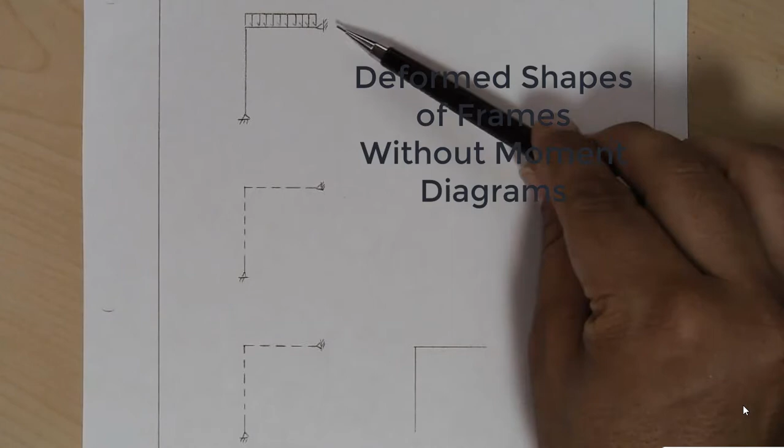In this example, we're going to draw the deformed shape of the frame shown, and we're going to do this without the benefit of having a moment diagram. What I'm showing here is the frame pinned at both ends, L-shaped frame, uniform load across the top beam. These are just two segments where I'm going to draw first a trial shape that we'll get wrong, and then the correct trial shape. Once I have that, I'm going to look over here and I'm going to sketch out the moment diagram that's implied by that trial shape.

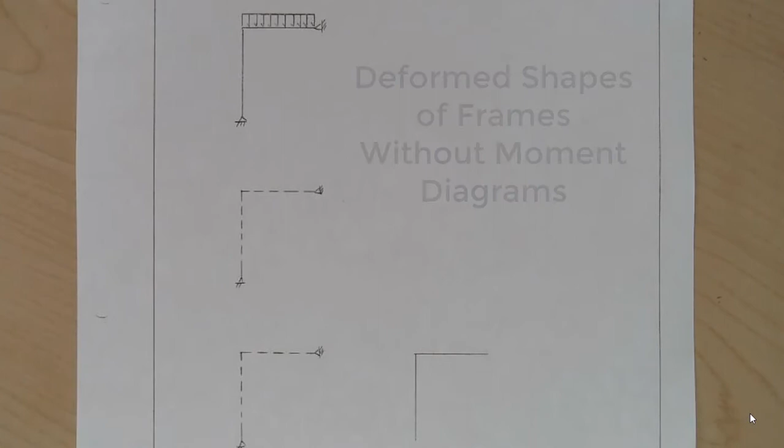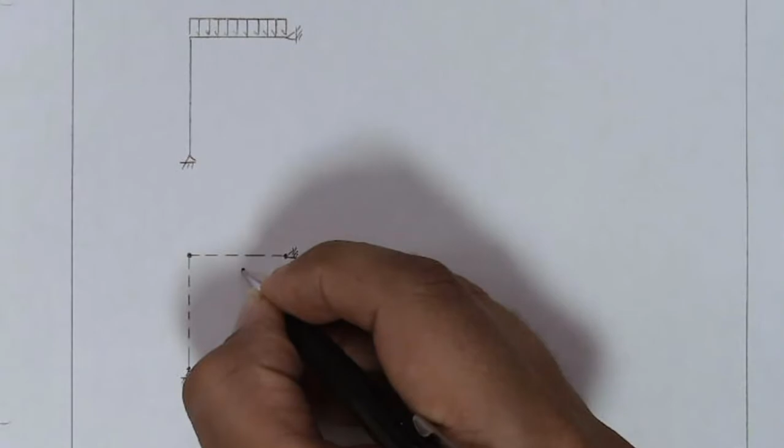Let's start. We have a couple pieces of information here. One is boundary conditions at each of the pins, and since we assume that frame members don't stretch, we also know that this point has to stay right there. I'm going to start by saying that, listen, here's a uniform load, it's pushing down, so somewhere here the middle of the beam needs to be pushed downward. So I'm going to sketch a little smooth shape through here.

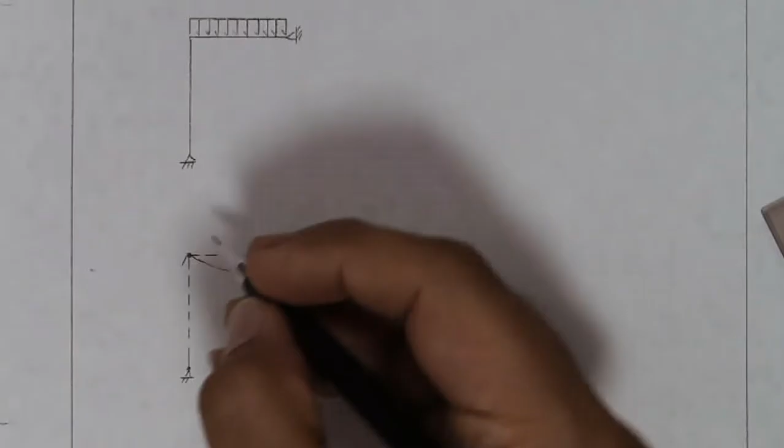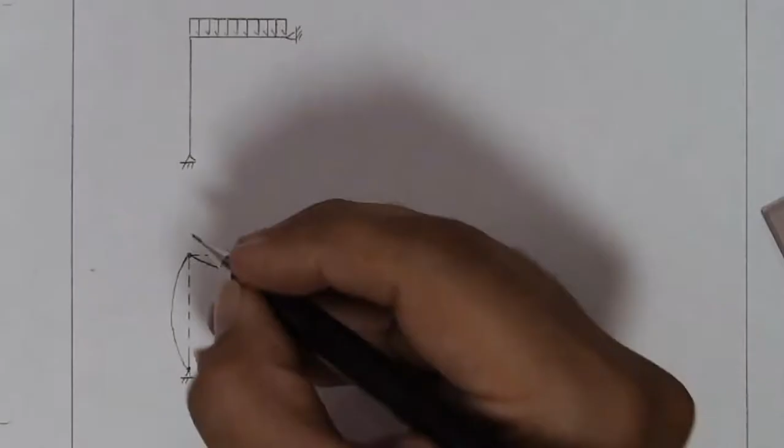This little point's distracting at this point. I'll erase it. I know that I need a right angle here, so I'll make sure that I respect a right angle at that joint, and I'll continue downward here. I'm gonna just darken this a little bit. So here's my first trial shape. And let's evaluate. I've accounted for the boundary conditions. I have accounted for the continuity of angle. I'm not allowing that angle to change. I don't really know if I've gotten my curvatures right. I have nothing else to reference it against.

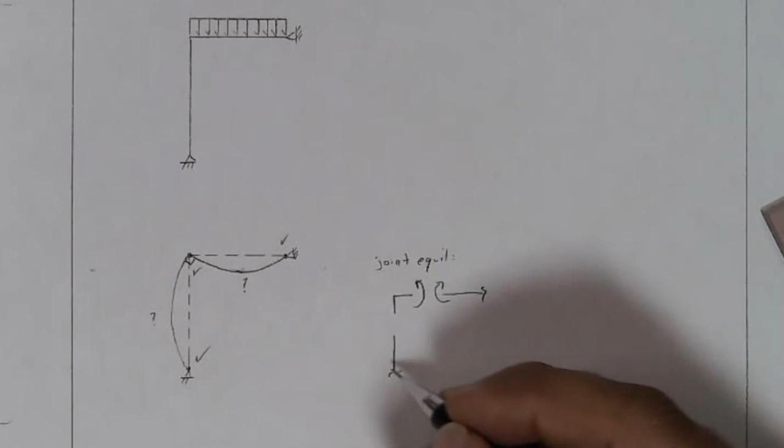But I do need to look at joint equilibrium. And if I look at joint equilibrium, and actually I'm going to look at the adjoining members here. The horizontal member on the right hand side has upward curvature, which requires a moment like that, equal and opposite onto the joint. Looks like that. This vertical member has rightward curvature that requires that moment. Equal and opposite onto the joint, I have that reaction.

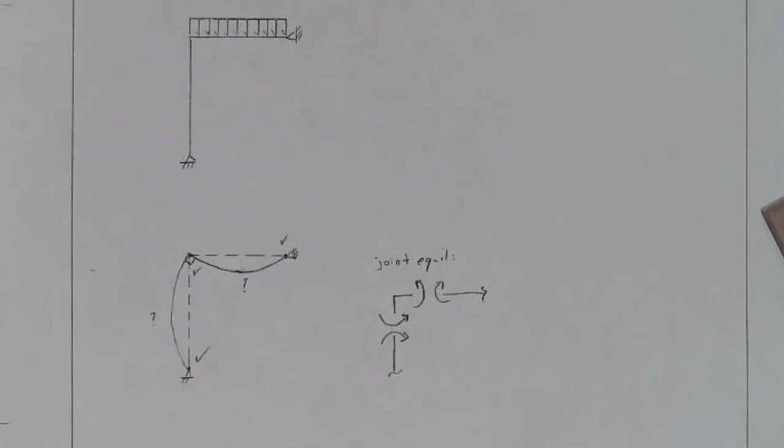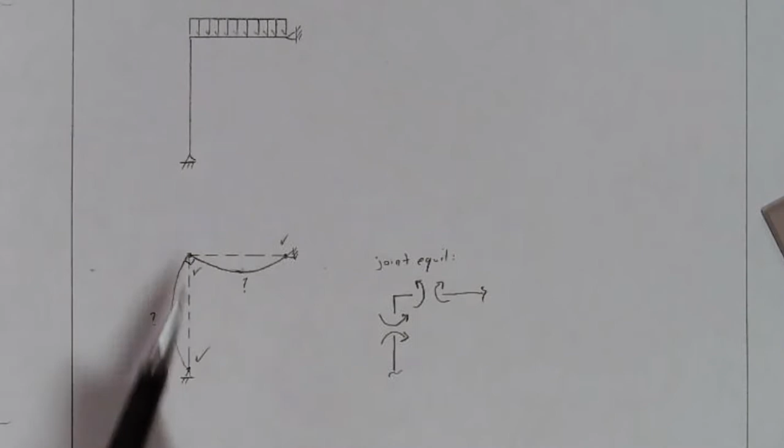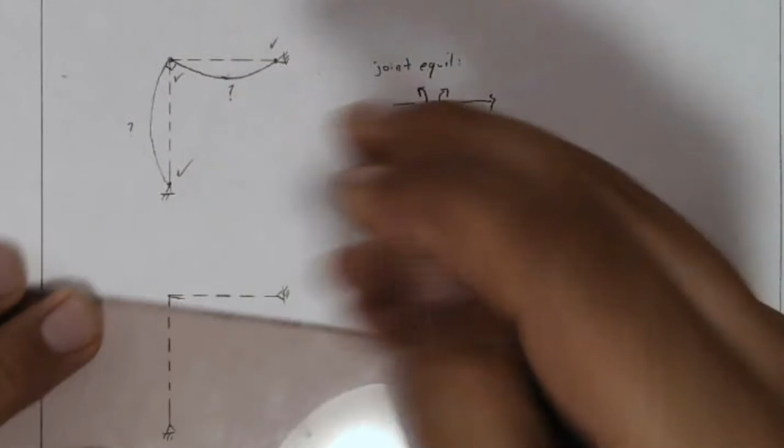And the problem that I've exposed here is that both of these moments are acting counterclockwise. So this joint, as I've drawn it in this shape, cannot be like that. That joint would not be in equilibrium, it would be spinning. So I have to fix something. And what I'm going to do is I'm going to allow this joint to relax a little bit. I'm going to make it so that it doesn't rotate quite so much. Now this is going to require some detail in the drawing. Certainly have to be careful with how I do this.

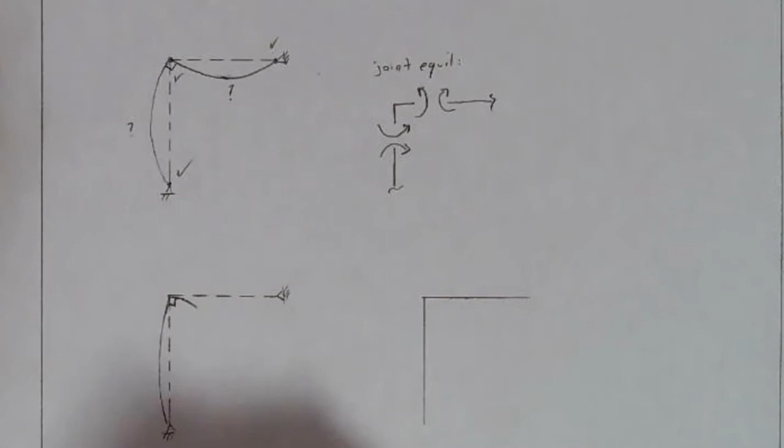So I'm still maintaining the right angle. I'm still showing a bit of a rotation. I'm still showing a bit of rightward curvature like that. But here I'm going to start by showing downward curvature, a point of inflection, and then upward curvature back in.

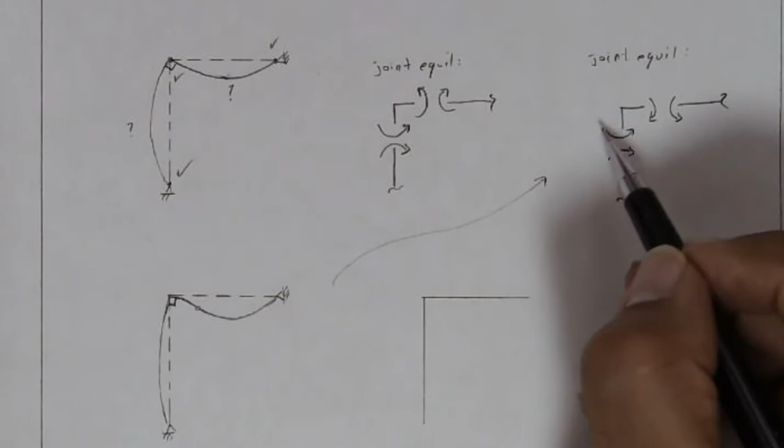So here, if I look at joint equilibrium in the other case, over here on the right hand side of that joint, I have downward curvature. Over here it's the same as before. What I notice in this sketch is that both of these moments point in opposite directions. That tells me that this joint is potentially in equilibrium. So what I've drawn here is now something that is physically consistent with equilibrium.

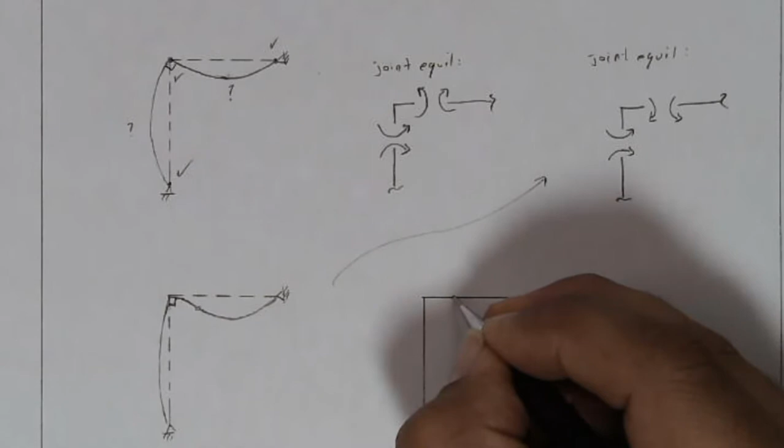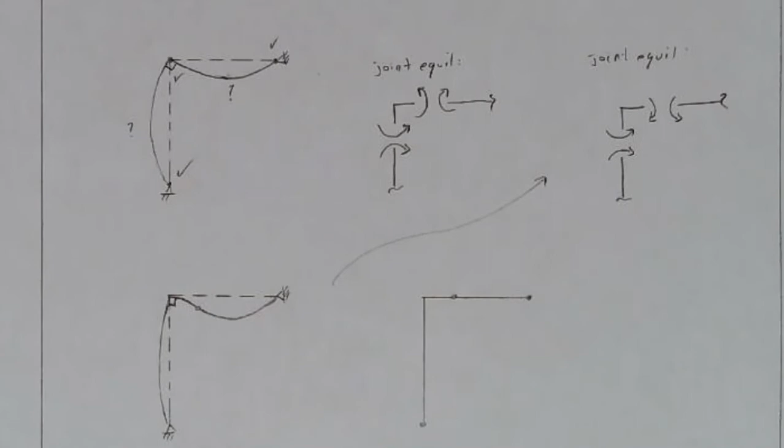To finish the problem, I'm going to draw the moment diagram that's implied by this deformed shape, just to see what it is and to see if anything strange comes out of it. I know that there's zero moment at a pin. Zero moment at a pin. And I actually know that there's zero moment right about here, because it's a point of inflection. I also know that because this is constant, my shear is linear, my moment will be parabolic. So I have a parabolic moment shape over here. To avoid a cluttered diagram, I'm going to draw it with negative moments on the top.

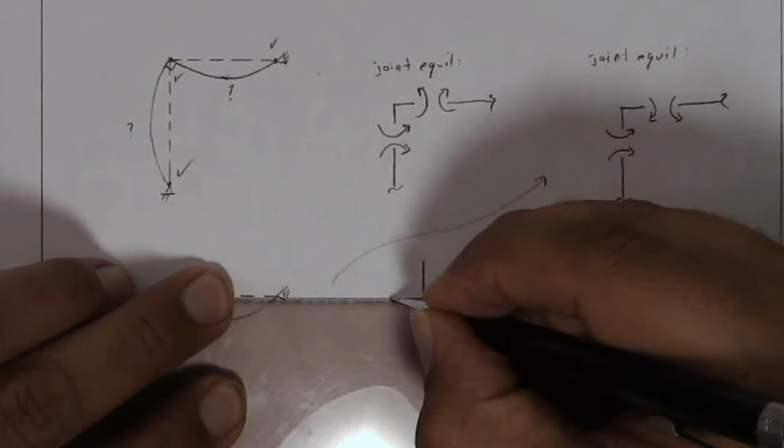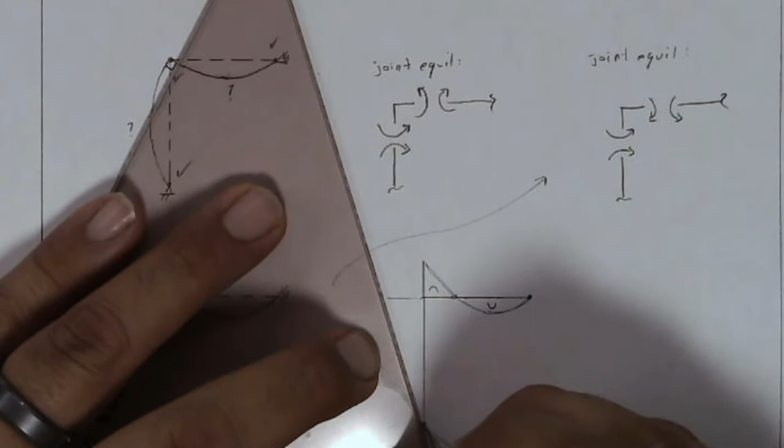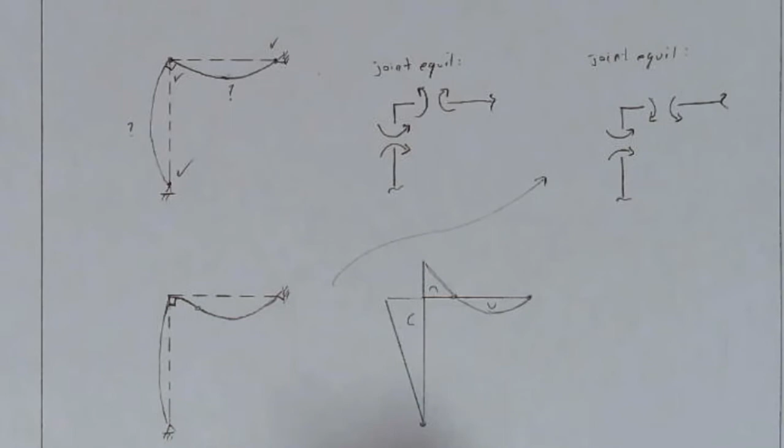And I know that these moments have to be the same magnitude here, so I'm going to draw them about the same. I'm going to go with a parabolic shape through the point of inflection. I know that this is downward curvature and upward curvature. On the column, I have zero distributed load, constant shear, linear moment. So I'm able to draw this right here. It is rightward curvature. You notice that both of these curvatures are consistent with the curvature that's implied here on these diagrams. So everything is looking pretty decent here. There's nothing that stands out as being out of the ordinary.

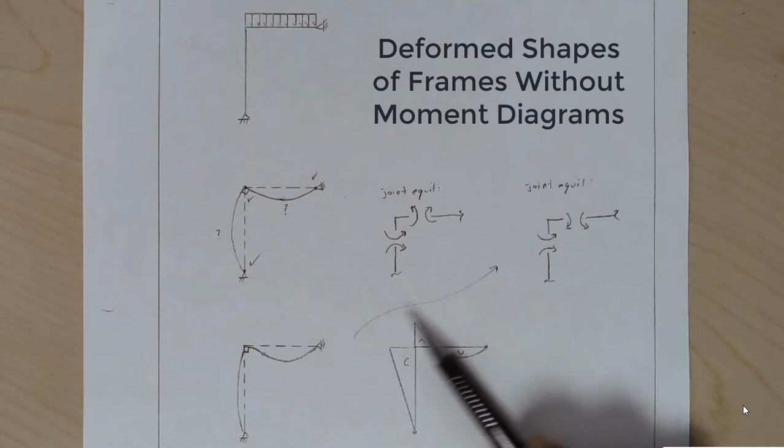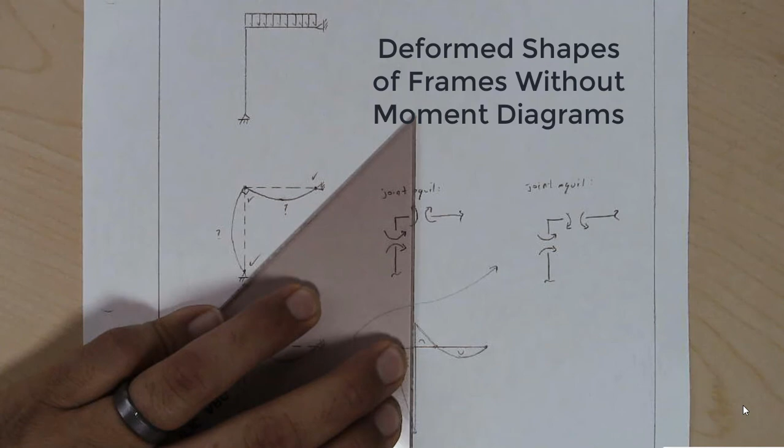So once again, we've drawn a deformed shape for this frame without the benefit of the moment diagram. We had to go through one step where we identified a problem with joint equilibrium. We fixed that problem. We rechecked joint equilibrium, and we then sketched out the moment diagram that was consistent with that. It looks pretty decent. Once you have a bit more experience, you'll recognize this as being the moment diagram that corresponds to a propped cantilever beam. If this were a fixed end over here, and there were a roller, and there were a uniform load, that's exactly what the moment diagram would look like. So we recognize this as something that we've seen elsewhere that makes sense. With that, the problem is finished.